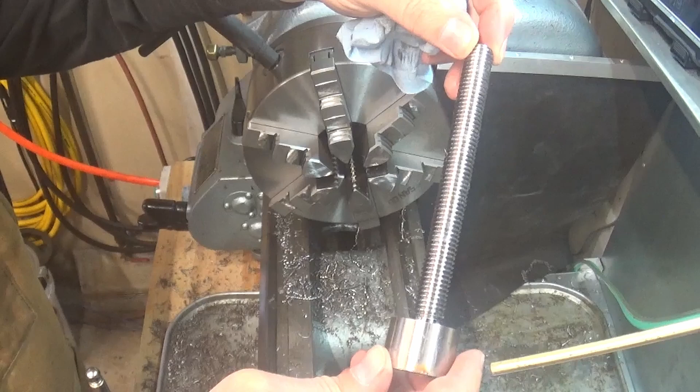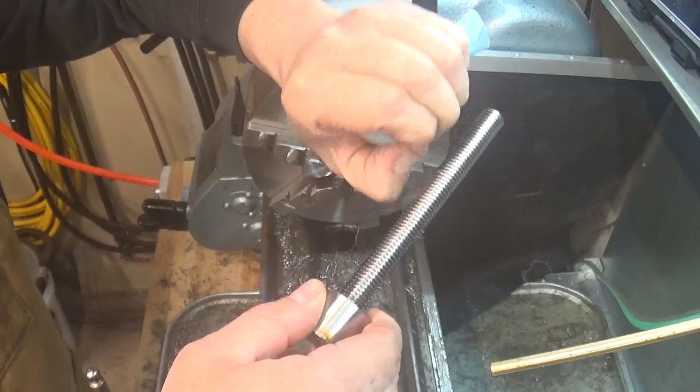Well, it is where it's going to be. It fits. It's tight. It's hard to tell if that's because the nut it's threading into is nylon. But it seems to work. And that's what matters.

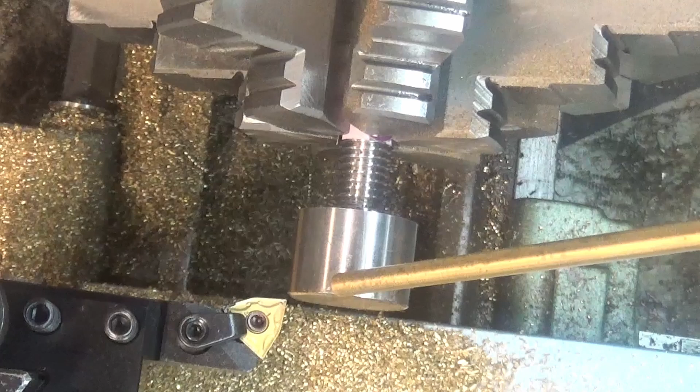So now I need to take it over to the mill and mill a hex on this, and I want to do it the same size as the lug nuts, which I think is 13/16. Okay. So we're going to put the hex on the end of the bolt. We'll start by facing this off and then turning it down to diameter, and then we'll take it over to the mill and mill the hex on it.

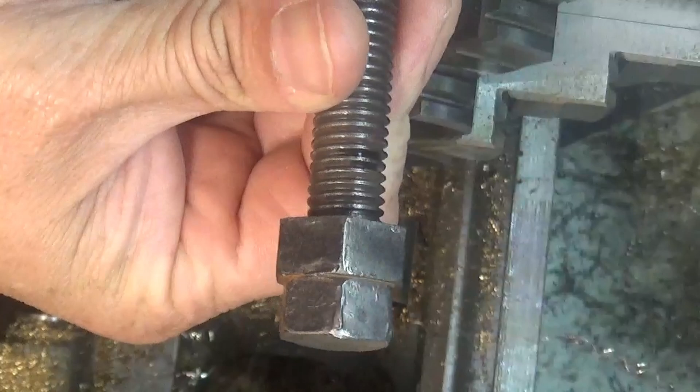There we go. Much better. That's good enough. Alright, so I'm getting ready to turn down the diameter here. Just like this bolt, with two different size hexes on it, so that it matches the lug nut sizes. So this will be 13/16 and this will be 7/8.

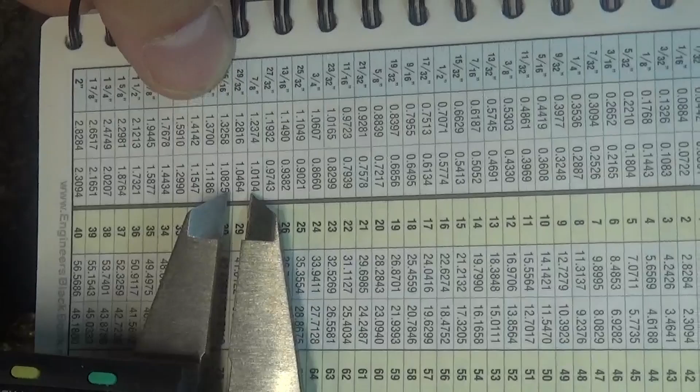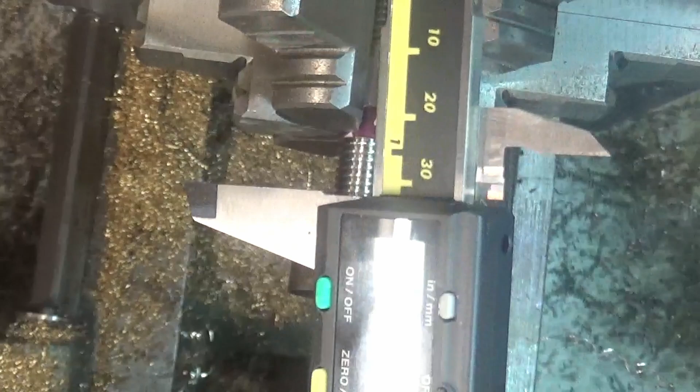And I've looked up in my engineer's black book here, see if you can see that, there we go, the distance across the corners of hexagons, and for 7/8 it is 1.0104 in diameter. So let's see what we've got here. We are currently at 1 1/4. You can see that. There we go. So I need to take off almost 1/4 of an inch. So let's turn it down a little bit and then we'll make a measurement after we get close.

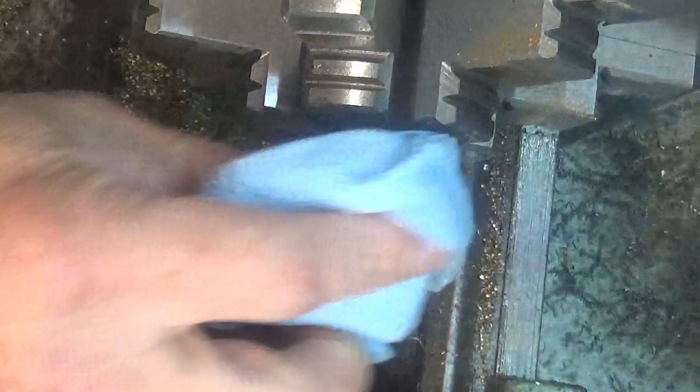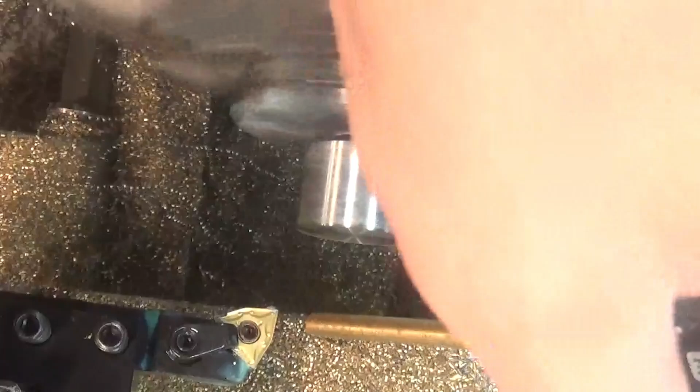Alright, that looks pretty bad. I've got this sticking out too far. Getting too much chatter. Pull it in a little bit. All right. Little sanity check here. All right, let's set this thing up in the mill and mill these flats.

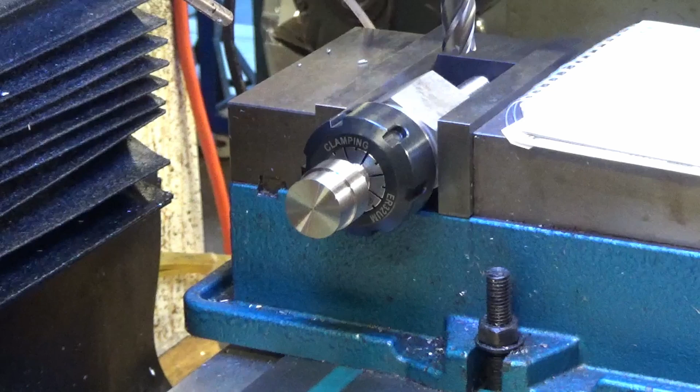All right, so I've got to put hex on these two surfaces. This one 13/16 and this one 7/8. I'm doing 13/16 because that matches the size I have lug nuts. And 7/8 is the next size up on a standard set of lug nut sockets. So let's see what we got right now.

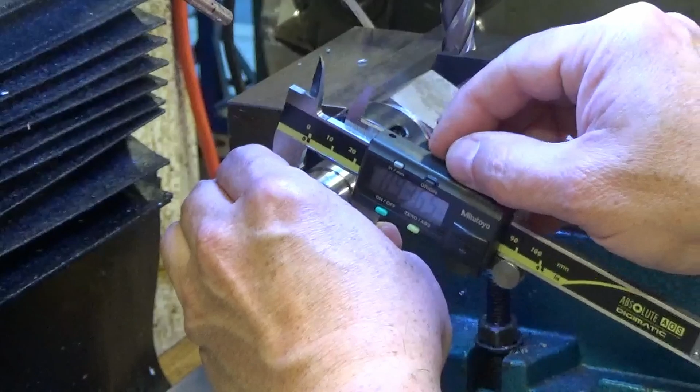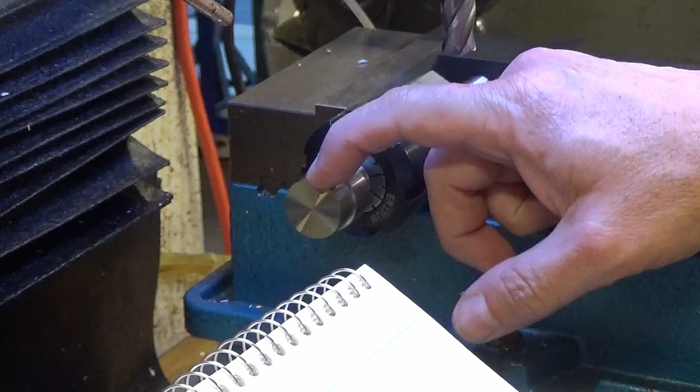.9365. And 1.0105. 1.05. Alright, let's see how much I have to take off here. Alright, so according to my calculations, I need to take off 0.0620 off of each surface or each cut on this, and 0.06775 off of this. So let's get started.

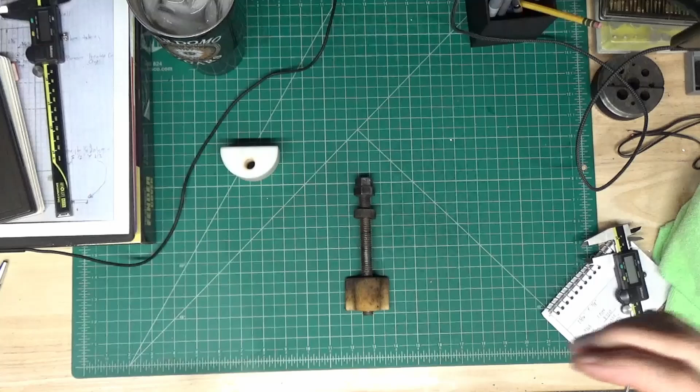Wow, those chips are hot. Alright, get this deburred, and then I'm going to put it back in the lathe and just chamfer these edges. Alright, I believe I am done with my new bolt.

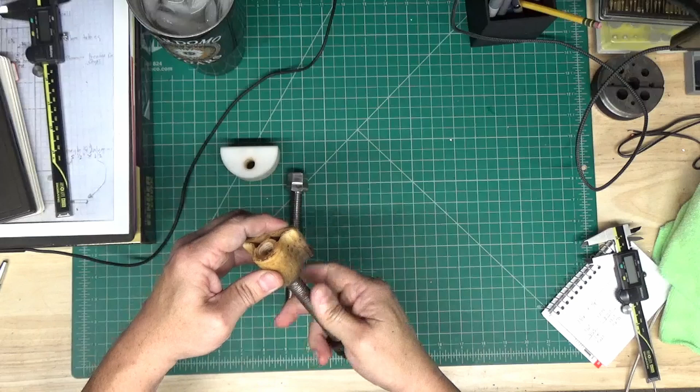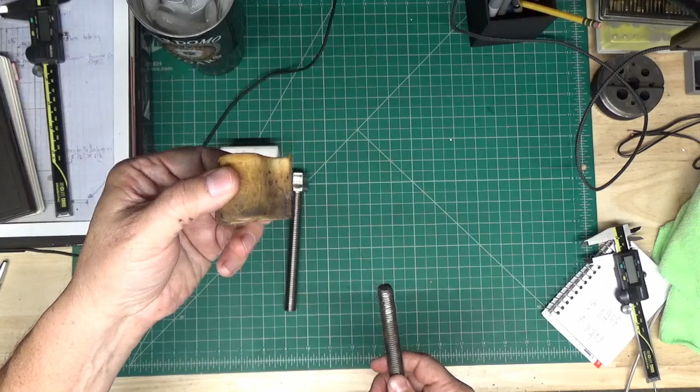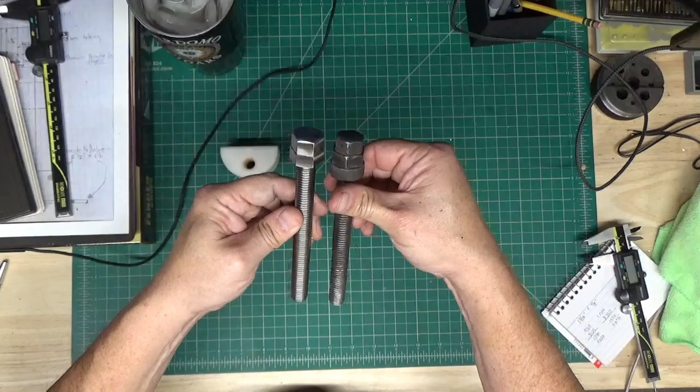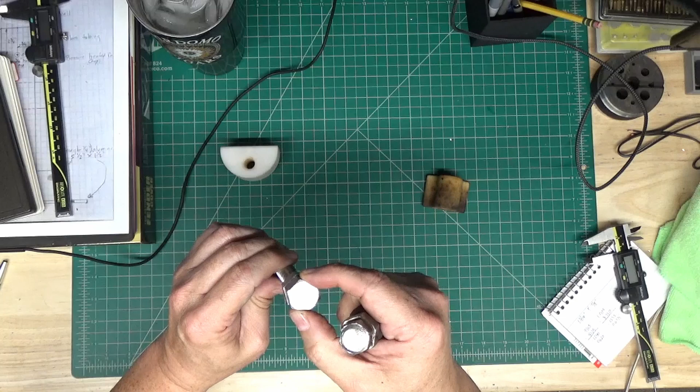This is to replace this. It's the spare tire rack bolt for my Jeep that holds the mount up for my Jeep spare tire underneath the Jeep body. So yeah, basically the same, except I did make this hex bigger because I got new lug nuts that are actually bigger, and I want them to match the same size as the lug nuts.

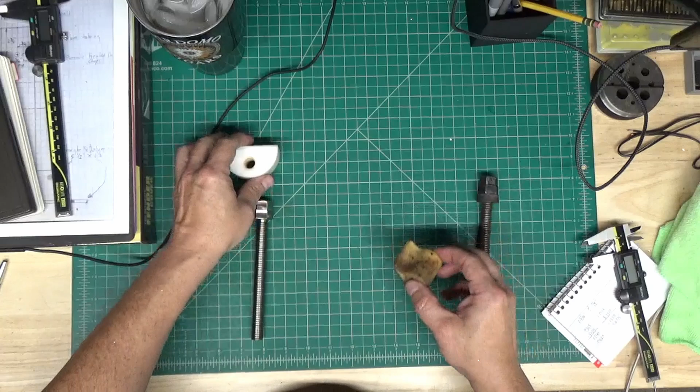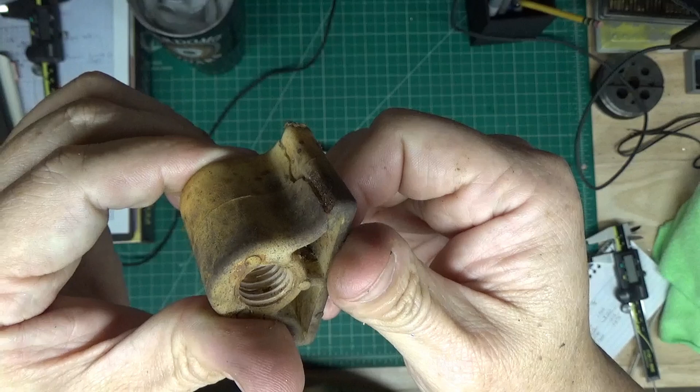And of course, as you can see, I made a new Delrin nut in place of the old plastic one, which is actually cracked. I don't know if you can see that. Yeah, you see the crack there. So a little bit sturdier, and of course, with this bolt being Inconel, it will pretty much never rust. Not that it was really a problem with the plastic nut anyway, but what the heck, I have the material, so there it is.